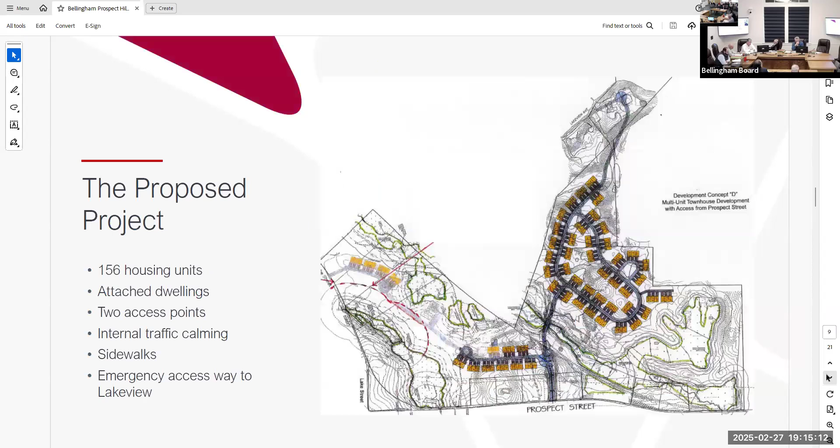In the report, we projected site traffic for the development based on the ITE trip models, which are based on actual observations of developments similar in character to this in terms of single family attached type units. Based on that, we do a weekday projection, but we really focused our analysis on the AM peak hour and the PM peak hour. Those typically are your worst traffic conditions during the day on the streets, because you have your commuter traffic.

In the morning it's commuters, maybe school related traffic. In the afternoon it's commuters, and then other related traffic occurring. So we focus on that. During the AM peak hour, we're projecting 19 trips entering the site and 56 trips exiting. In the PM peak hour, we're projecting 53 vehicle trips entering and 37 exiting. Normally, in a residential development, the morning period, most people are leaving the site, going to work or school, not necessarily coming back in. In the afternoon, the peak direction is everyone coming back home.

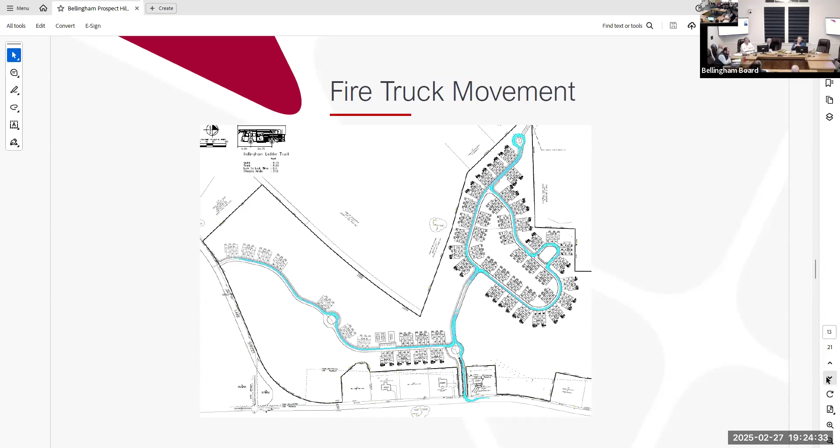Next slide. Next slide just shows the Lake Street side, a little blow-up of that, but all of this is in the follow-up memo, the response memo to the peer review, as well as, I believe, a lot of it is in the original report as well.

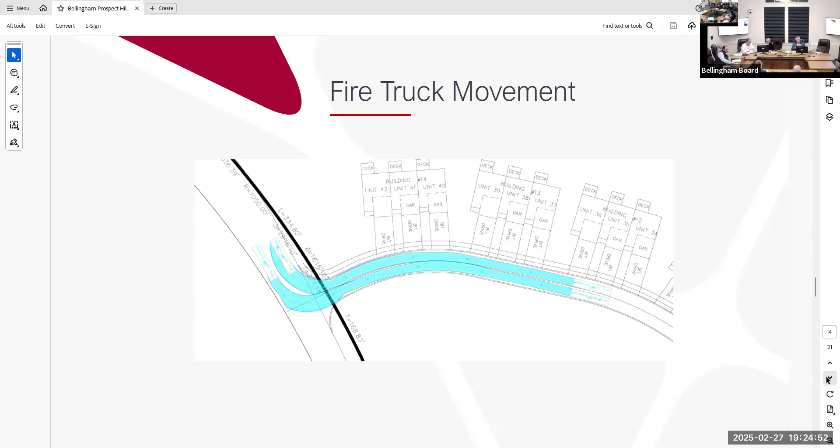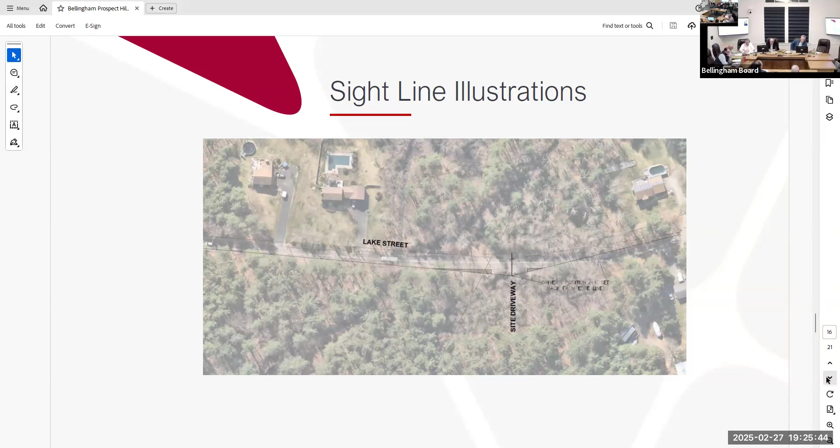Next slide. All right, so 140 and Maple - the question was, well, you didn't look at that, how come?

The first reason is it's about a mile away from the project, and when we first set the scope up, we didn't know we were going to find and estimate and forecast 85% of our traffic going in that direction. So it was fine - it was a good comment, good question.

The long-range Route 140 corridor study that the town had BSC do a couple of years ago basically recommended this layout for the intersection. I know it's been tweaked or built out in pieces over the years, and now it's basically built out to probably as much as you can do. It's exactly what the Route 140 corridor study recommended for the intersection.

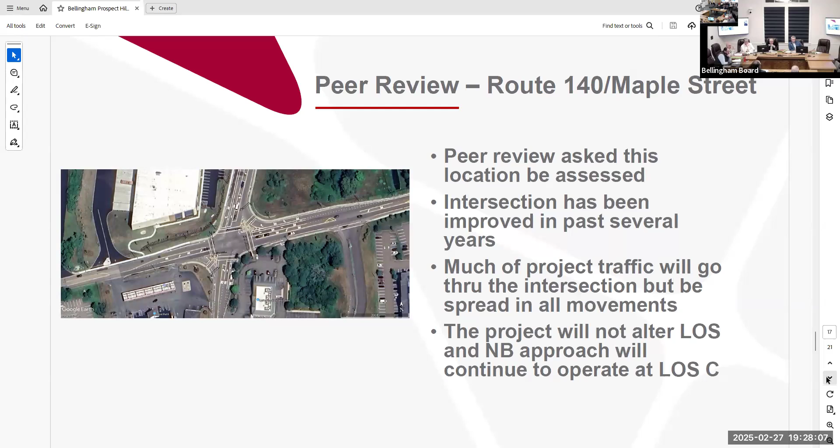In concluding, we know we can have safe, efficient access and egress to the project via the two site drives. The site is designed to accommodate fire apparatus movement. We will have some impact on the 140 intersection, but it's gonna be a pretty small impact, not changing anything. And with all that, we did develop some recommendations for action.

Some of them are fairly standard at the site drive. Some of them relate to the intersection of Lake and Prospect. Next slide. So this just lists them.

Stop control on our site drives, which is normal and typical. Maintain clear visibility - we've got adequate sight distance at our drives, but it's important to maintain it over the years. In the peer review, MDM requested some sightline triangles be shown on the site plan ultimately approved by the board. Within that sightline triangle, you maintain your vegetation, keeping it low line or set back, cut back, and you wouldn't put any major signage within that sightline triangle that could potentially block visibility.

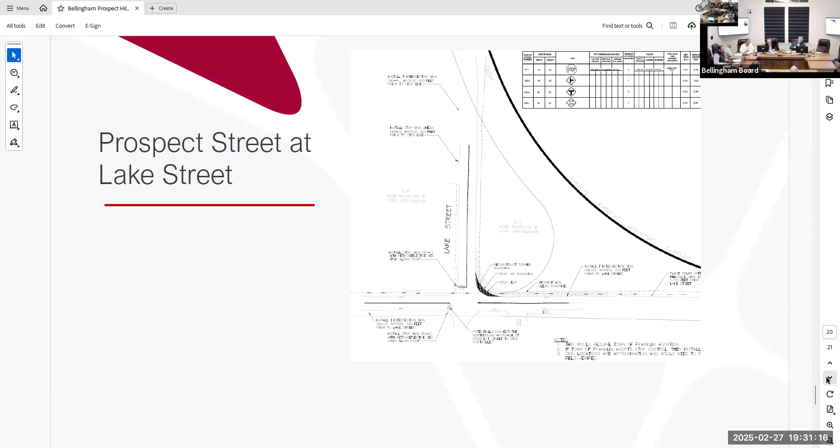There's some, and I guess next slide, Rob - this one's a little tough to see, it's a little clearer in the responses. So right now, let me stop sharing this and I'll pull up the actual plan itself.

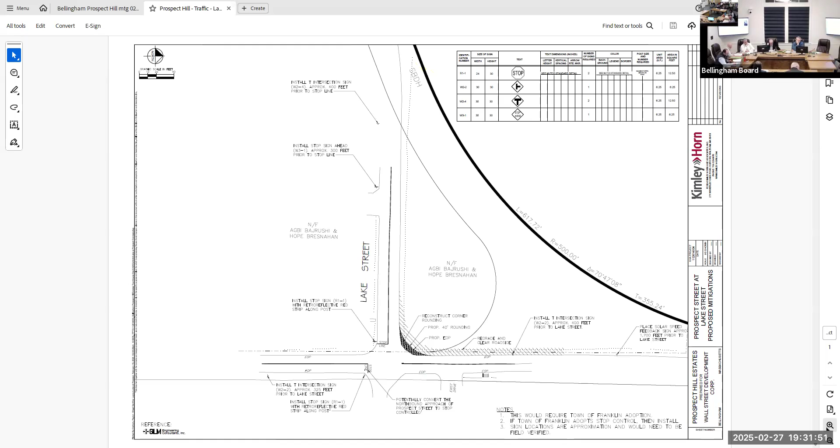Okay, it's a little bit clearer. So on Lake Street, I don't know when, but the town put in an advanced warning sign, like a stop ahead sign, as you're heading towards Prospect Street. It's really a non-standard sign that they put up, so we've recommended making one that's more compliant with our traffic engineering standards approach, so everyone knows - it just becomes more standard for the stop ahead.

We also recommended - again, it's a complicated intersection because the town of Bellingham owns basically Lake Street. If you look at that plan, everything going up to the top side of the page, Franklin owns Prospect Street and certainly going to the left side of the page. And then in the middle, it's owned by a private homeowner on the corner there. So somewhere along the line, I forget the year, but instead of having that wide layout that it shows with that dark black border line, the intersection was modified. I don't know the full history of it, but they got permission from the property owner to make Lake Street come in as a 90-degree T intersection.

The property owner still owns the middle, the land to the right of Lake Street. So a lot of the actions we've outlined, some will require the Town of Bellingham to decide whether they want an LED stop sign at the stop line, or an advanced warning sign meeting current standards. On the Franklin side, coming towards Lake Street, we recommended more warning since it's a lower volume approach, but you can come around one of the corners and suddenly you're at Lake Street, so we want to make sure everyone knows there's an intersection there. We've even suggested potentially making northbound Prospect Street a stop as well, so you'd have two approaches stopped, but that would require Franklin agreeing it was a good idea.

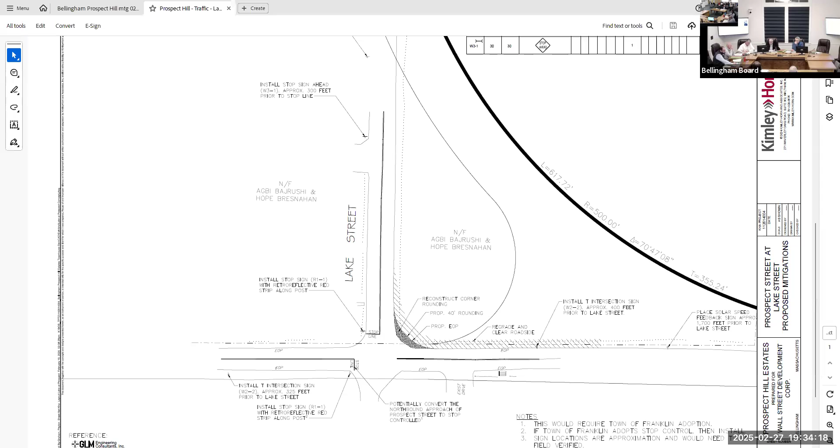I think that's it for me. Yeah, that was the second to last slide, the last slide just said thank you. I'll be happy to try to answer any questions, and I know you want to hear from your peer review consultant too.

What I'd like to do is hold off the questions until we hear from Bob, so we have more information to gauge our questions on. Bob, the floor is yours. Okay, thank you, Board Chair and board members.

For the record, Robert Michaud, Managing Principal of MDM Transportation Consultants. We were retained to represent the town's interests, the planning board's interests in this project. We issued peer review commentary initially on December 6th and subsequently on February 26th, today. That second review addresses some of the remaining comments or clarifications that came out of the applicant's response. The applicant's engineer, Kimley Horn, had submitted a response to our comments in a letter dated February 20th. So I'd like to focus on that set of comments.

As Bill Scully had indicated, our overall finding is that the studies were conducted to a good industry standard. We concurred with many of the methodologies and outcomes of the analysis presented in the originally submitted study, but we focused principally on a couple of areas, one of which Bill mentioned earlier: whether the study area should have been extended to include the Route 140 intersection, which is the first major intersection you come to and where the bulk of the project traffic would be going to or coming from.

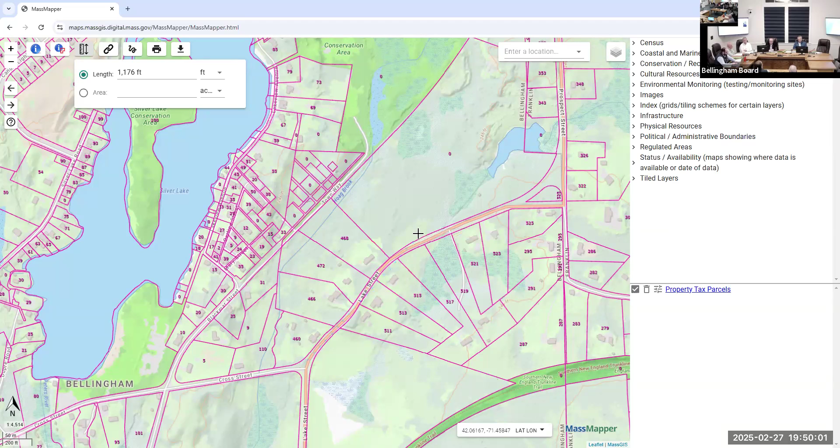Almost a quarter of a mile. Yeah. So that's 1 or 2 tenths of a mile. About a quarter of a mile. Okay, thank you. Yeah, no problem. It's four houses.

So that area floods and the water comes over Lake Street. So will elevation, I mean, if trucks enter the site, it has to be a fairly big access point.

I know we want to stay more on the traffic related items, but if you don't mind, if I can kind of answer. Absolutely. So there are site plans that Lou ended up submitting for that access. And there is grading in that area. There's actually a swale that's proposed. So there are items, I don't want to get too much into the weeds because we want to talk about traffic tonight, but, thank you so much, yeah, we can discuss it more at the next meeting.

Any other question from the audience?

Yes, sir. It's on Morel, 513 Lake Street.

The data collected in that traffic study, if I understand it right, is a one-hour snapshot at different times of the day, is that correct? Correct. That was 2022 when it was collected? The intersection was counted in May of 2023, for the morning and afternoon peak hours. We do two-hour counts in the morning time period and two hours in the afternoon, and then within those two-hour periods we pick the peak 60 minutes that occurs within that time frame.

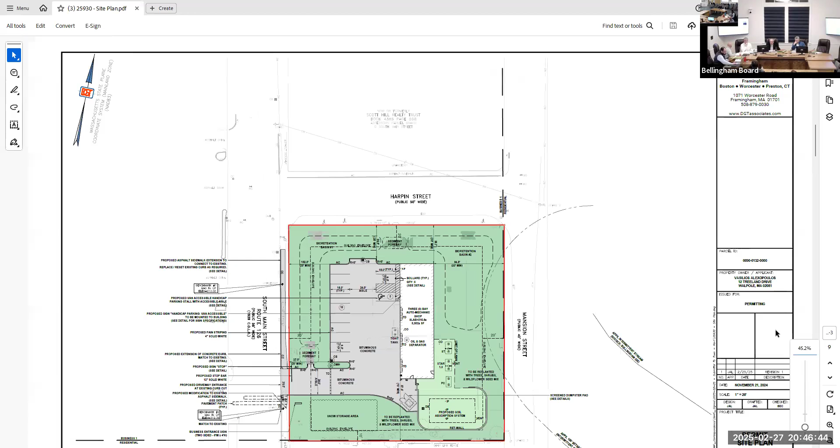With that, I'll pull the plans up on the screen. Do you have the exhibit plans too? I have all the sheets here if needed. Are you talking about the turning exhibits? Yeah, turning exhibits, sight distance, landscape plan, all of those. Let me pull up the site plan first, and you'll just give an overview for the public and the board of what's changed, and we'll get into more detail when we finish this review of the material. I think this is the first time the board's seeing this, as well as the public. I figured instead of you reviewing it on your own, I'll give a brief overview so it's a little easier to see what's going on when you look at it later. And just so the public's aware, these will all be posted on our website. We just received them yesterday, so everybody's getting up to speed.

Well, floor is yours, sir. Thank you very much. Hello again, and good evening. I'm Joe Lozano. I'm representing my client here, Bill Alexopoulos, the owner of the property for the proposed development at 211 South Main Street in Bellingham.

I'm here tonight to give a brief update on the changes made to the overall program and site layout since we last met. First and foremost, a big program change was that the rent-a-car operation has been removed from what was originally proposed. We came in the first time with a mixed-use building for a three-bay auto mechanic shop specializing in transmission repair, with a rent-a-car facility attached next door. That rent-a-car facility has been removed between the last plan and this one. So there's a little less traffic coming to the site, less need for parking, and no more stored cars on site.

That was a concern last time, so we thought that was a good improvement. Also, we've shifted the building back onto the site a little further inboard, towards Mansion Street, creating a wider area in front of the service bays. This allows both regular passenger vehicles and tow trucks to easily enter the site, back up, drop off cars from their beds into the service bays, and leave the site without interfering with cars parked in the lot.

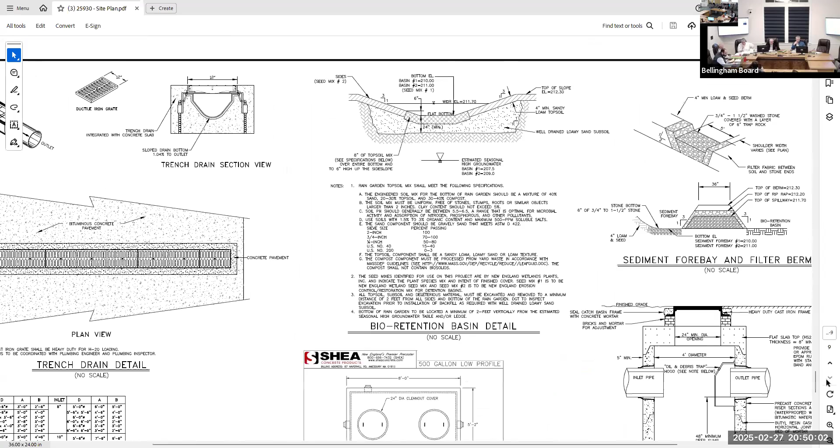Screening, which maybe we can flip some plans later on. We've provided a much more robust landscape plan after reviewing your town bylaw with regards to the plantings that are required, because we directly abut a line between the business zoning district and the residential zoning district. Plus we have 3 street frontages, and the length of our planting area. We took all those things into consideration, and I've included in my response letter to the peer review engineer how our new landscape plan complies with the regulations in place. I think that will help overall with the screening that was a concern last time, looking at the site, the parked cars, and the dumpster. So I feel like we're definitely improving from the concern raised at the last meeting.

We also did a sight distance study, which I know was talked about at length at the last meeting. But essentially, our site has been designed so that none of the proposed landscaping we're installing on the property will interfere with any of the existing sight distance triangles from the intersection along Mansion and Harpin and South Main Street. The grade changes at the corners where the sight triangles go over our existing property are within a foot of the existing site, so we're not making any giant mounds that would interfere with sight distances.

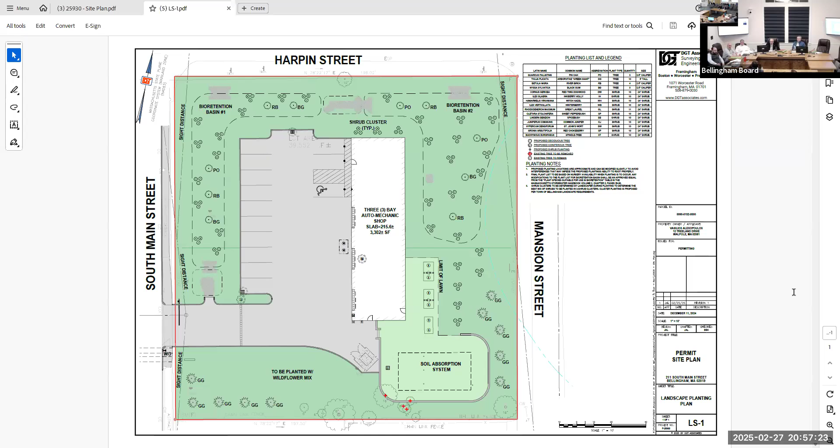I think we may have one question in the back. Yes, ma'am. You guys have made great strides at making this much pleasanter. But right off the bat, on the first screen you had, the snow—we already have flooding problems on Mansion Street. I know the snow collection, and we're not always gonna have storms like this, but we have flooding issues already. It's not just people on Harpin Street and Mansion Street, you can go further down, people lose their swimming pools.

That's one thing. My other concern is the AAMCO sign—you guys have done a really good job keeping sight lines, but where is that sign gonna go in relationship to pulling out of Harpin Street? Where is it, how big is it gonna be? Is it gonna get shut off in the middle of the night? Is it gonna be glowing in everybody's windows?

We'll probably discuss that in greater detail at a future meeting, but if you want to give us a quick snapshot—yeah, I can give answers to those questions. The sign is located on the south side of the driveway along South Main Street. The sign is proposed to be a 4x6 sign, so it's not obnoxiously tall or large, and it's not located anywhere near Harpin Street. It's almost as far away from Harpin Street as you can get on the site.

The snow storage area is located just east of that, and we've created a sculpted basin area to help retain the snow melting on the site better than it previously was. We've also incorporated into our long-term pollution prevention plan a provision that if excess snow arrives on the site and can't be stored within that area, with nowhere else to put it, then it needs to just be removed from the site.

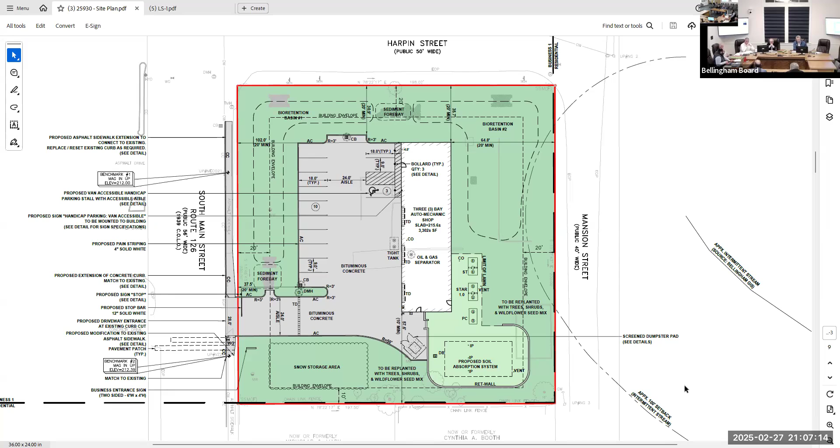It's part of our MS4 permit, but the long-term O&M plan still recognizes there needs to be ongoing record keeping. It's just the submission method, but I'm getting into the weeds. Anyway, that was one of the other items noted in the peer review. There were some revisions, and I figured it would be good for the applicant to just come in and get everybody up to speed on anything that's changed.

The peer reviewer mentioned he should have a letter back by the end of next week, which is good. I'm still giving that extra week buffer for all of these things, just in case, for planning purposes. But that's what I have currently.

One thing to know, I'll pull the plans up because I have them, but two items I'd like Bill to address, and Jay, there were questions from abutters because there were two specific areas that were of concern for runoff. Looking at the plans, I believe long-term you've addressed these, and Jay, you mentioned in a previous hearing that you've done some temporary things, which you could reiterate a little bit later. But if you could address those right now, and then any other questions or comments the board and public has would be good.

I'm going to pull up the plans on the screen so everybody can see. Bear with me for one second.

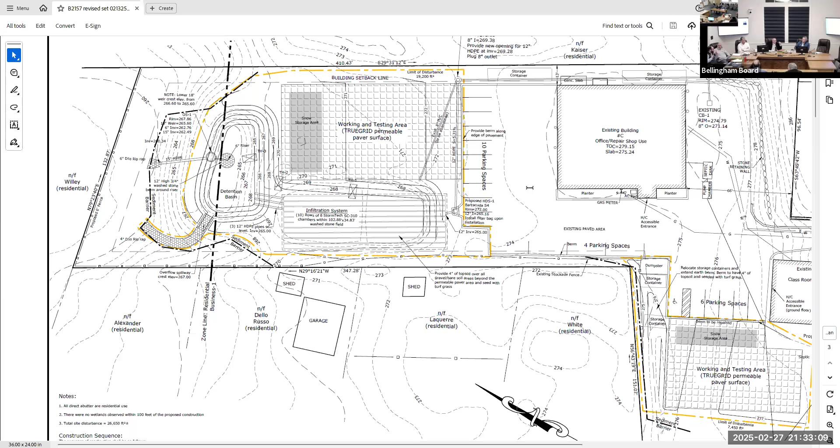You're giving me a look, Brian. Too far, it's too late. Can you give us an update? Well, it's just making sure that, if you're fine, we'll continue to March, the first meeting in March. Want to do that? I just gotta make sure the peer review is back.

How about the usage questions for the development plan? Do we need follow up on that? There's no proposed change in use through this board. There is no change in use. And do we have that defined use now?

Meaning, how many types of businesses are there? What business, I mean the question that was addressed from the audience. Maybe it's a zoning enforcement officer that's involved, but yeah, it would. I don't want to slow it down, but if we're going for a development plan, we gotta... Yeah, I think you're going into mission creep, that's not before us. That's before the select board, and that's also before Tim. So as much as I would like to also resolve that issue for the neighbors, it's not before us.

Okay, so were we doing a stormwater plan or a development plan? Or are we doing both? You're doing both, but the development plan isn't regarding the use, it's regarding the disturbance associated with these improvements.

Can you just remind us again, I apologize, but I'm gonna say this. When you say development, has anything changed? We've had about 4 meetings over the course of the year where we've talked about land and trees, and there's a fence that's missing that hasn't been put back up. What development are you talking about, the parking? I guess I'm still not clear. Has development changed? Because we've been in 4 or 5 meetings, and every time we bring up an issue, nothing's resolved. I'm still not clear when you say development, where have we ended up?

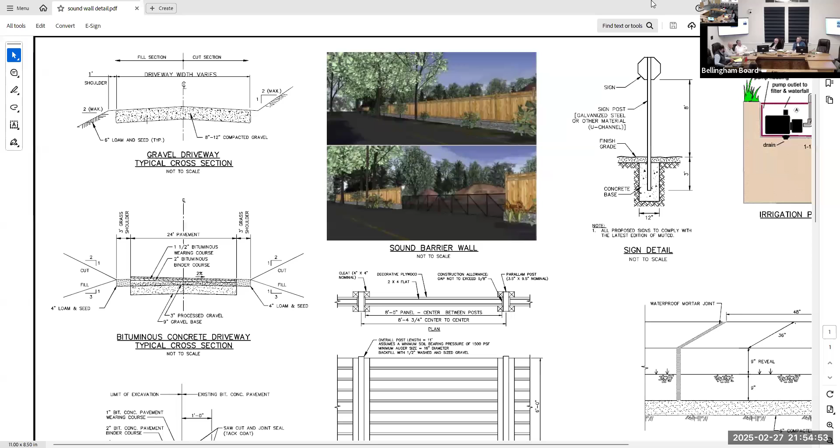Perfect. Thanks, Gavin. Want to make a motion? To continue to March 13th. Congratulations. Do I have a second? Second. Any other discussion? Call for the vote. Bill, aye? That motion passes unanimously.

Thank you. Have a good night, everyone. Betsy, I apologize, you're late for the meeting. All good, I'm glad you got some work done. No, we're close to my latest, so that's good. All right, take care, take it easy. We'll be in touch.

Ron, can you tell us about the Harley bond reduction? Oh yeah, that one, we're just going to ignore that one again. Okay, that one is in DPW's hands.

Let's talk about the Blackstone North Street extension. I have a document. The applicant has requested a 24-month extension. The weird thing is, there actually was a Permit Extension Act for COVID, and this very well may have been included in it, which would go to 2026.

The issue is that there are some gray areas with it, so I just told the applicant to request the extension, because the reason the extension was requested was due to a health reason, that's why he was unable to start the project, a pretty substantial one. So I think with this project, the North and Blackstone Street one, that was whittled down from, what was it, 30 buildings to I think 5.

A lot of triplexes were whittled down, so it's a beneficial project, and I would recommend requesting the extension, because the applicant had to go through a pretty lengthy process with Natural Heritage, he had to do a turtle safety plan. Yes, that's a thing. And that actually, I think, was just closed out recently, so I would recommend extending.